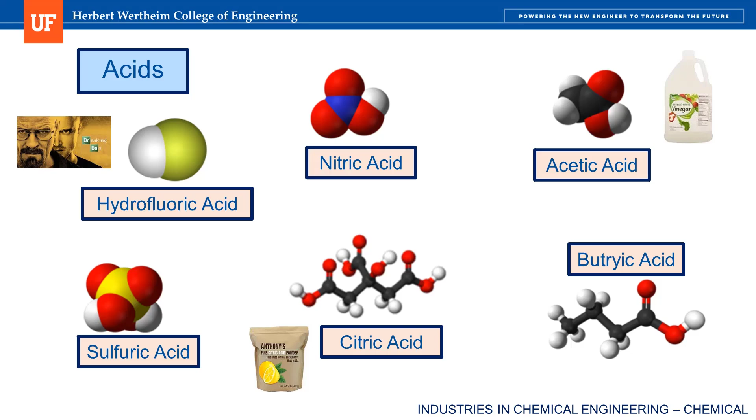Also in the chemicals class are solvents. Some examples include tetrachloroethylene, acetone, toluene, dichloromethane or DCM for short, tetrahydrofuran or THF for short, chloroform, and dimethylformamide or DMF. It's easy to forget about chemicals like this when I think about chemical engineering, because none of them are readily available to consumers. While perusing the shelves at my pharmacy, for example, I've never found a bottle of tetrahydrofuran.

However, some of these are disguised as other things. For example, nail polish remover has acetone in it - that's the primary component. Toluene, as I previously mentioned, is the main component of paint thinner. Regardless, all these chemical solvents are crucial in the production of other products and chemicals, so they're very important.

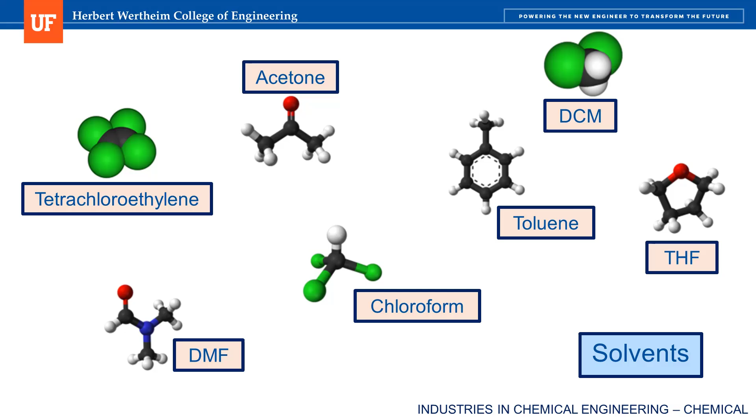However, if you really think about it, the word chemical can mean anything with a molecular formula, which is, of course, literally everything. Here's another example that I love to use. Oxygen is a chemical produced by chemical engineers as well, often used in breathing apparatuses for the elderly. How do you think chemical companies make the oxygen to put in tanks?

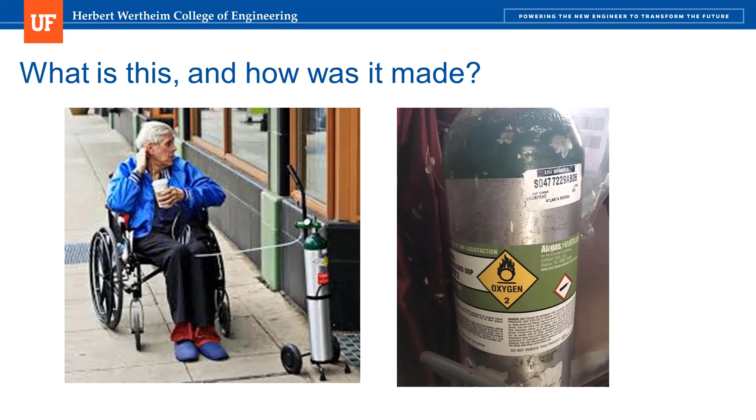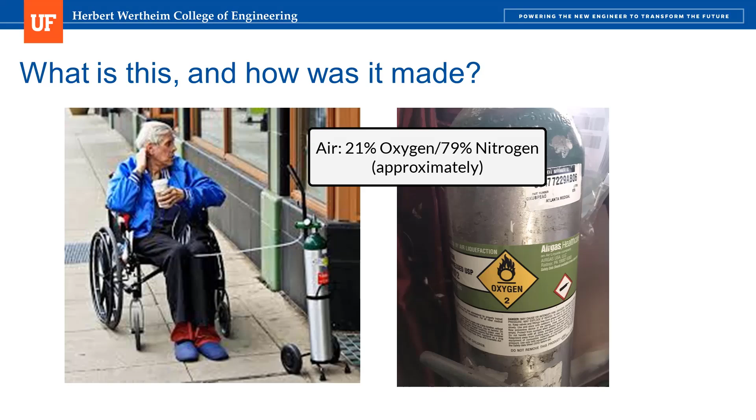While it's true that O2 can be produced by a chemical reaction, there is a much cheaper and more readily available oxygen source: the atmosphere. The only issue is that air is only 21% oxygen. So in order to be effective, engineers need a process that separates oxygen from the other 79%, which is primarily nitrogen. Separation processes is another title of a future course you'll take.

Modern technology has figured out a way to separate oxygen from nitrogen right in a device that you can wear on your hip. This oxygen concentrator uses a membrane for separation purposes. Nitrogen passes through pores in the membranes, while oxygen cannot fit through these same pores. This allows the device to deliver 95% pure O2 right to your nostrils.

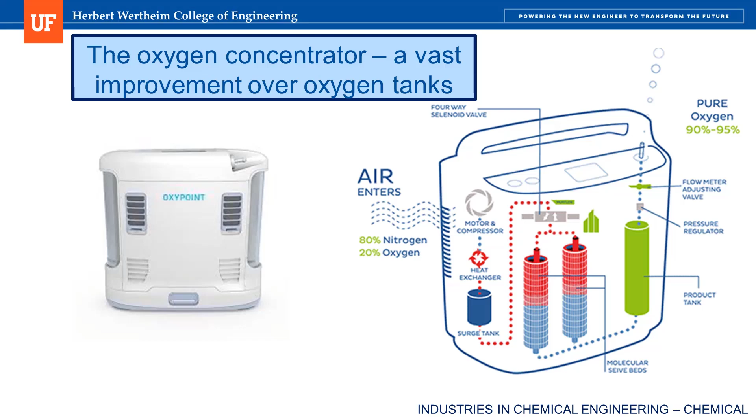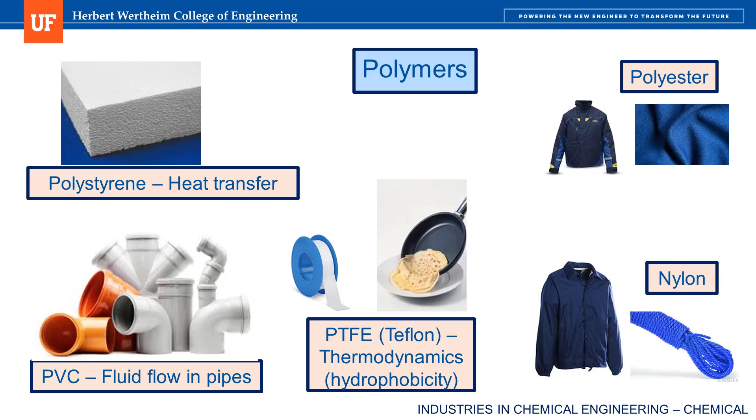Looking at this diagram and all the chemical engineering sounding language, it's not too difficult to imagine a chemical engineer's involvement with this invention. Polymer materials have diverse applications stemming from their material properties. Not only are chemical engineers involved in producing these materials, but when I look at them, I can see how chemical engineers use these materials in various applications as well.

For example, styrofoam is a very cheap material, good for insulation. You've probably seen a styrofoam cooler on sale at your local grocery store. Why is styrofoam a good insulator? Because it traps a lot of air, and air has a very low thermal conductivity. You'll learn more about this term in your heat transfer course.

Another example is PVC, often used in residential plumbing because these pipes are cheap and flexible yet rigid, and safe as well. Studying how fluids flow in these pipes will be the subject of your future fluids course. Yet a third example is polytetrafluoroethylene, or Teflon for short. It's often used as a coating on pans to make your food slide nicely out of the pan without sticking.

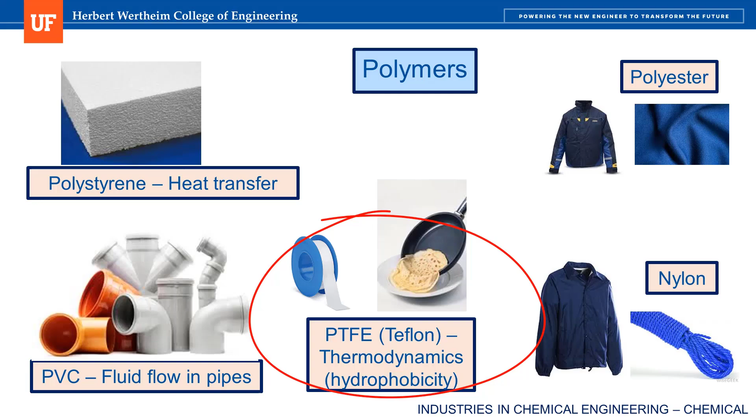And thermodynamics can explain the hydrophobicity behind this.

Another example that really fascinated me when I came across it recently was when I had to replace my air conditioner earlier this year. I remember learning about refrigeration cycles in my thermodynamics class, but for some reason I had never drawn the connection from class to real life, and looking into how my new AC unit worked really fascinated me.

When most people think of an air conditioner, you probably only think about the big cube that goes on the side of your house. But this part is only the condenser part of the cycle. In the condenser, refrigerant flows through copper coils that serpentine back and forth on the sides.

Copper is the material these are made out of because it's a very good conductor of heat, and a fan at the top draws air over the coils to remove heat from the refrigerant, which condenses it, as the name condenser implies, from a vapor to a liquid.

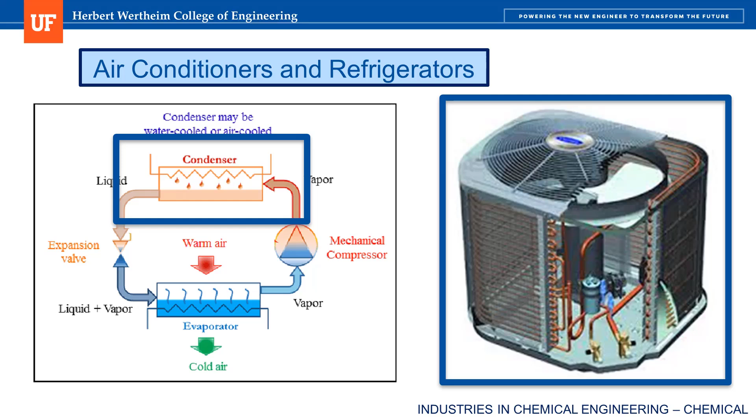Afterward, the liquid refrigerant flows through an expansion valve where the pressure is reduced and the refrigerant gets very, very cold. Then it goes to your air handler, which is probably somewhere inside your house or in your garage.

The air handler propels warm air from your house over the coils in the evaporator. Energy is transferred from the air to the refrigerant, and as a result, the air gets colder and goes back into your house, while the refrigerant vaporizes.

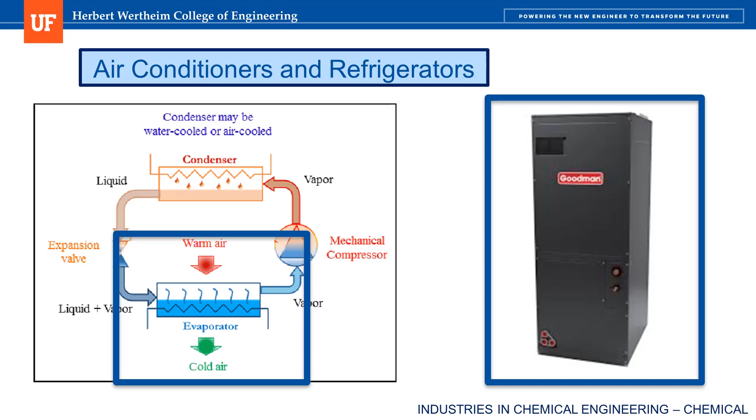The refrigerant is then pressurized and sent back to the condenser to start the cycle over again. What is the chemical identity of this refrigerant?

Given what I just told you about the refrigeration cycle, the refrigerant has to have some very particular properties. For one, the freezing point has to be very low, since you never want it to freeze inside the pipes. That rules out water, because even in Gainesville, the outside temperature can dip below the freezing point.

It also has to have a high heat of vaporization to maximize the amount of energy it can remove from the air. It must also have a high critical pressure and temperature, since beyond the critical point, the substance exists neither as a vapor nor a liquid, but rather as a supercritical gas that cannot condense.

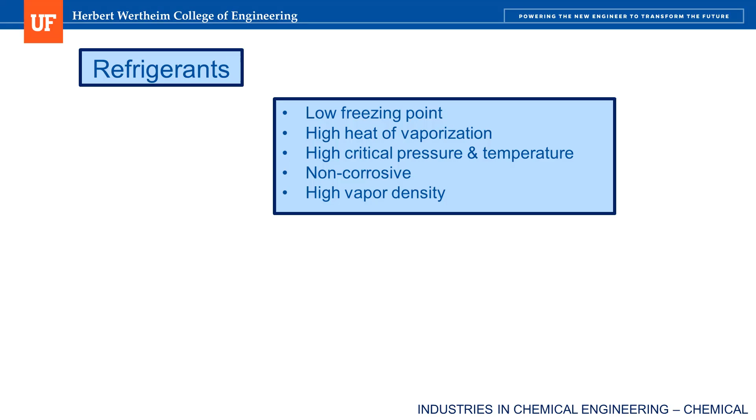It must be non-corrosive to the copper pipes and have a high vapor density, again so that the efficiency of the energy transfer is maximized.

In the olden times, a chemical that had all these properties was chlorodifluoromethane, more commonly known as R22 or Freon. Unfortunately, you've probably heard about the adverse environmental effects of Freon, which has caused it to since be replaced.

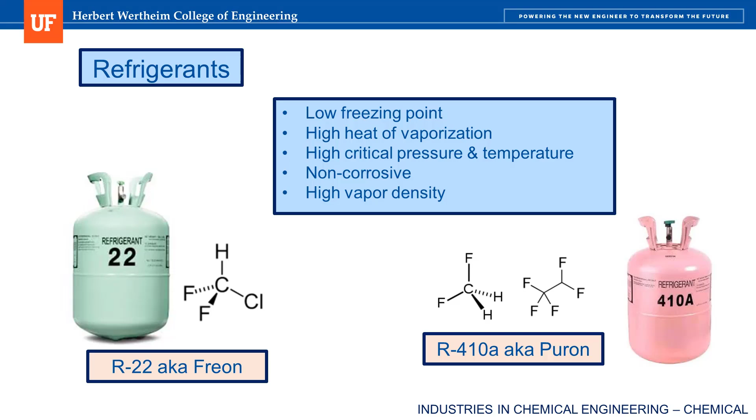Indeed, modern air conditioning units that you buy today all have a different refrigerant, which is called R410A or Puron, and contains a blend of a few different molecules.

The setting of chemical manufacturing occurs in the chemical plant, which is chock full of pipes and process units. We will draw plenty of process flow diagrams this semester, including simplified boxes and arrows. But keep in mind what these boxes and arrows actually represent.

To get a feel for what a chemical plant might look like, I strongly encourage you to go to YouTube and type in the search bar 'chemical plant tour.' This will bring up plenty of videos that are all very informative.

The companies that you can work for in this space include the Dow Chemical Company, which recently merged with DuPont, BASF, Ascend, Evonik, Airgas, and 3M. While you've probably heard about some of these companies, I'm willing to bet that you haven't heard about all of them. Go see them at the Career Showcase this year.